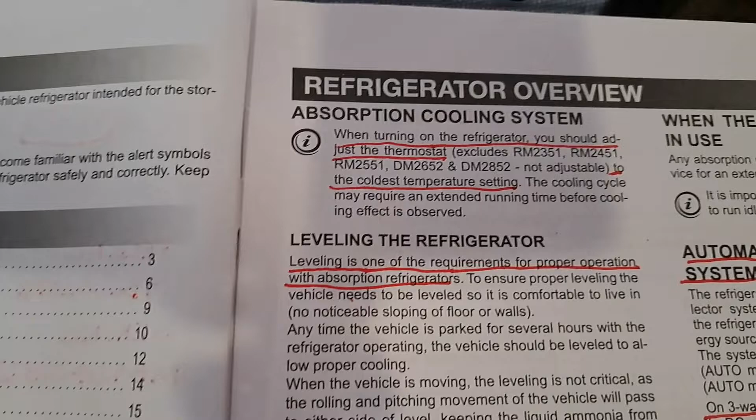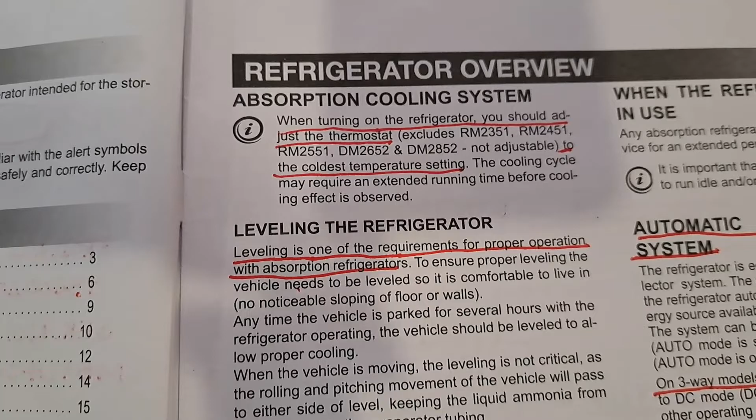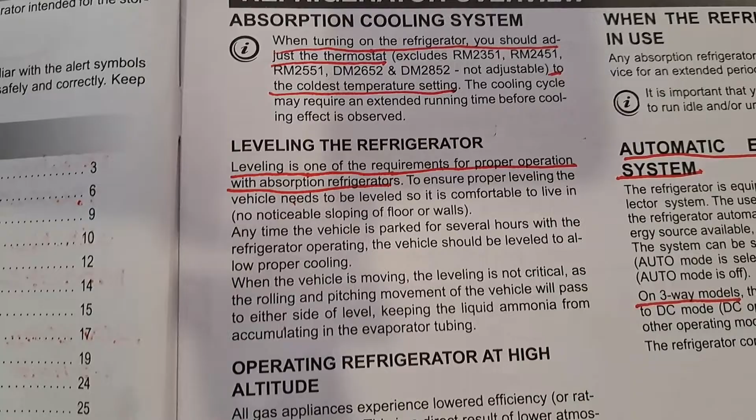Now, on the next page here, there's a couple important things about the absorption cooling system. As I had already pointed out, when you start it up, you should put it on the highest setting to get it cooled down. Now, the other important thing is to have your Little Guy Max or your travel trailer level. It's important for that to occur. And the other thing that they point out here is that if you're above 5,500 feet in altitude, only run it off the 120 AC.

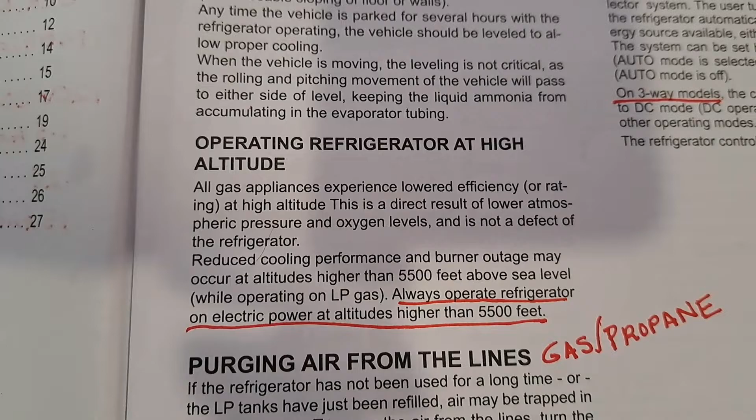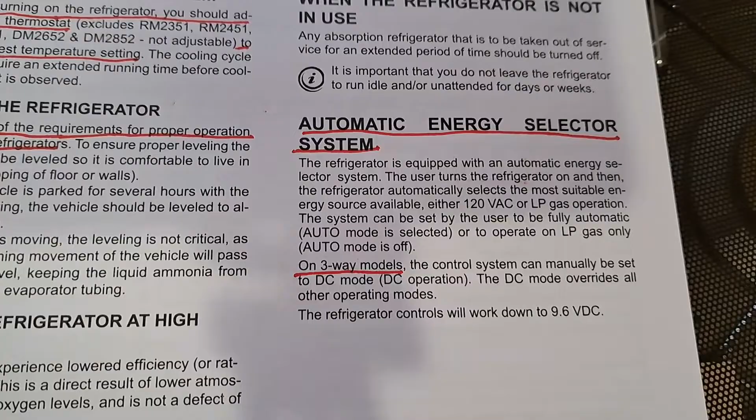Now over here, we also have the automatic energy selector system. When it's on auto, if you have shore power, it's going to select that first. If there's no shore power, then it's going to go to propane next, or gas. And if you have neither of the two, it'll go to the 12-volt DC, but that has to be selected manually. So you can select it for gas by pressing this button here.

It went to gas, and it'll automatically switch over. And then for DC, you press that, and it goes to the 12-volt DC. And if you hear that in the back, the power panel just turned on the fan because we're drawing 12-volt DC from the battery.

With this Dometic refrigerator, there's a feature on here when you're trying to ignite the system with the gas propane. If it doesn't light after 3 attempts, where it'll attempt for 45 seconds with a 2-minute interval between before it starts the next cycle, then this check light will come on. Okay, to reset that check light, you turn it back off and turn it back on.

Now, if during that time the AC shore power comes on, then it'll switch over to AC power being the priority when you're in auto. And to get that check light off, you got to turn it off and back on again.

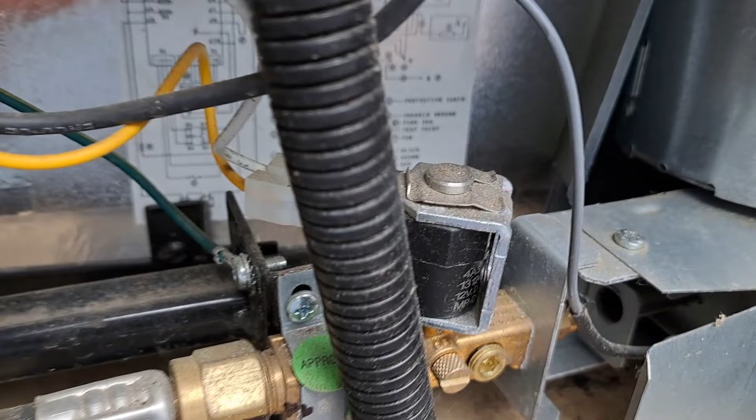Here we are outside of the little guy Max, and this is the lower access panel for the refrigerator. And over to the right here is your propane. And you really can't see it. You can see it a little bit, but the way to check, wet your finger, touch this, it's hot, it's working.

Okay, for cleaning your refrigerator, it's suggested you just use warm water. Do not use any cleaning solutions or whatever. Everything should be able to come off. Now, one thing it does mention is this sensor over here. If that's disrupted after you're through cleaning, make sure it's back in position so that it will sense properly. Now, when we're traveling, what we do is we end up using these guys over here.

YETI ice blocks, blue ice. What we do is these fit right into the freezer. We use 2 of them, and when we're traveling and on the road, we take one of these blue ice packs and we put it down here in the refrigerator. Now, we've traveled up to 7 hours, 8 hours in this situation,

and when we get to the new place, usually we're going to be on shore power, but if not, the propane will also take care of the refrigeration. Now, some people use propane when they're traveling. I don't suggest that. That's pretty dangerous. And some people have used their battery because the vehicle is charging their battery. And if you get into a place with shore power and the battery's not fully charged, you can bring the charge back up. I prefer not to even use the battery.

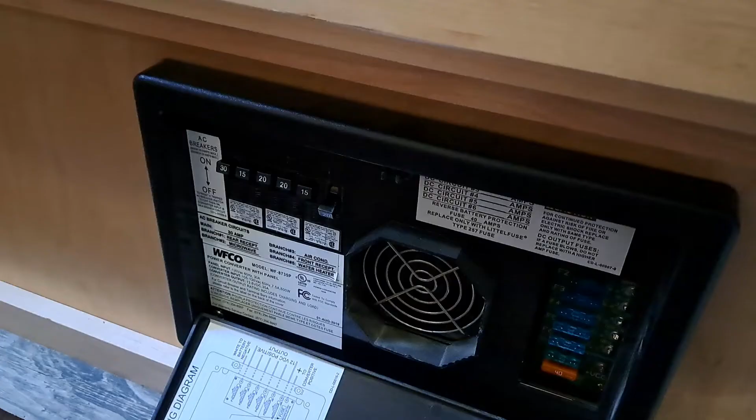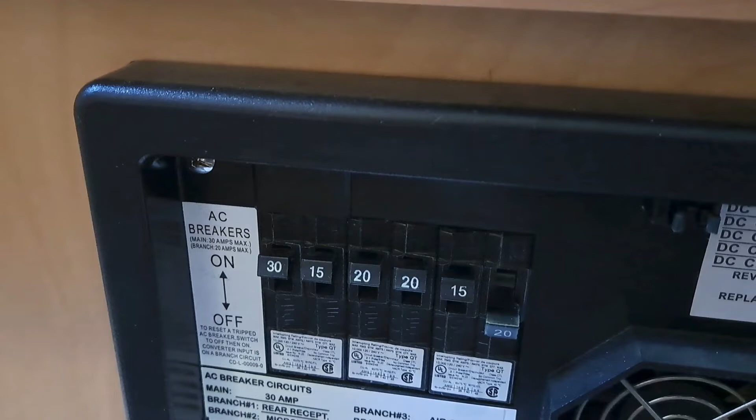Okay, we're inside the Little Guy Max. What you're looking at is your power panel here. And for the refrigerator, as far as the AC, 120, AC 110, depends on who you talk to, right over here is the 5th breaker from the left. It's a 15 amp circuit breaker that is for the refrigerator AC. And then over here, the 2nd fuse down from the top is a 15 amp fuse. That's your DC side for the refrigerator.

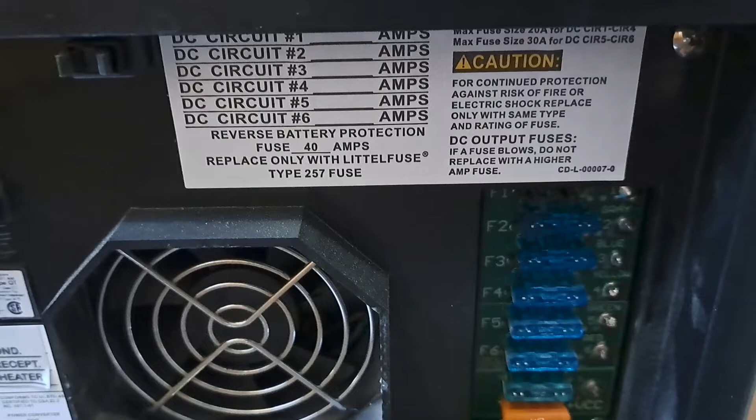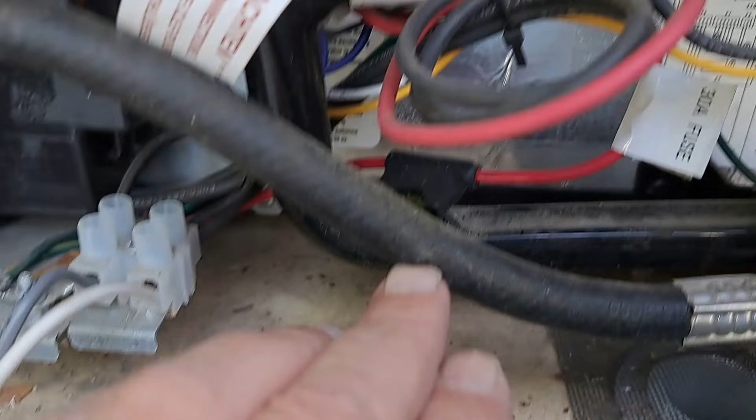Alright, we're outside the Little Guy Max. This is the lower access panel to the refrigerator section. Here's the upper. What you should do is remove that, make sure those fins are clean, nothing's obstructing it. And as far as fuses, you've got another DC fuse right here. It's a 30 amp fuse, and they mark it as a 30 amp fuse here on the DC side.

Over here you got an electrical cord, that's your 110 AC, and inside this control box here there's a 3 amp and a 5 amp fuse. I would suggest if you get into that control box, you may want to take it to an RV repair shop to take a look at that. So this ends the video.